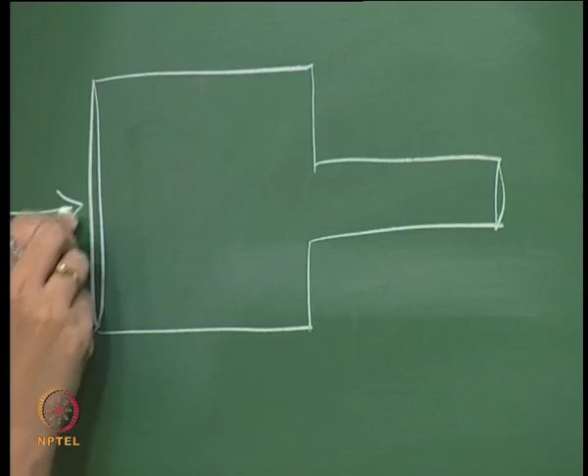Okay, and let's try and look at what is so special about that. So essentially what we see is that we have a large, slightly wide entrance and a slightly narrow exit. So we have a large entrance and a narrow exit, right? So let's complete the story first. Okay, so what you see on the wheel is that we have nozzles like this, four of its kind, right?

And the blue here is essentially steam being injected into these nozzles, right? Steam is injected into these nozzles. It enters through this wider entrance and comes out through this narrow exit, and it comes out and hits these buckets or blades with such an impact that it is able to rotate this wheel at 30,000 RPM, right?

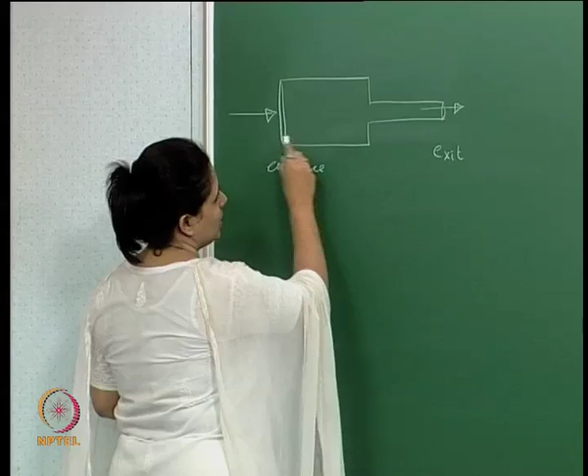And this ingenious way of doing this was first accomplished by the Swedish engineer Carl de Laval, and this is also called Laval's wheel, in 1893. So this was the first time something like this was actually used. So essentially what is it that is causing this? So we have a jet of steam coming in and producing a lot of impact, right?

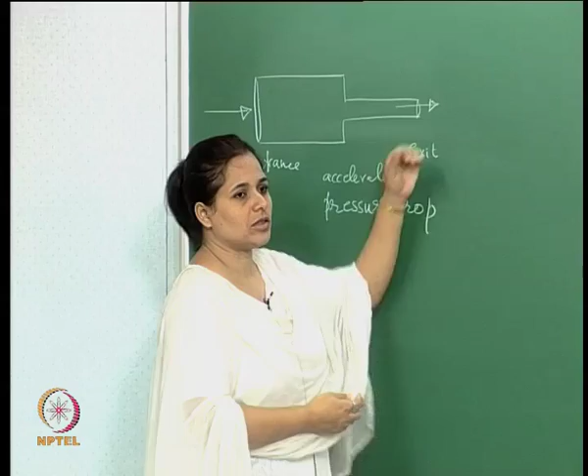So essentially what is happening is steam comes in and it is choked, that's the technical term to use. So essentially it comes here, it accelerates. There's a corresponding pressure drop. And when it hits the buckets, it's able to rotate it at speeds as high as 30,000 RPM, and that was pretty large at that point of time, right. So this is essentially a convergent nozzle.

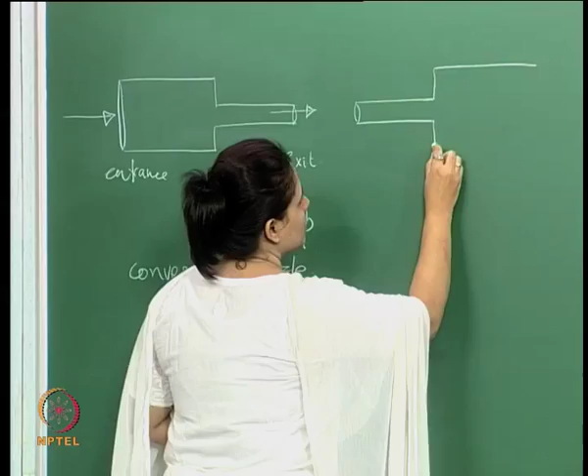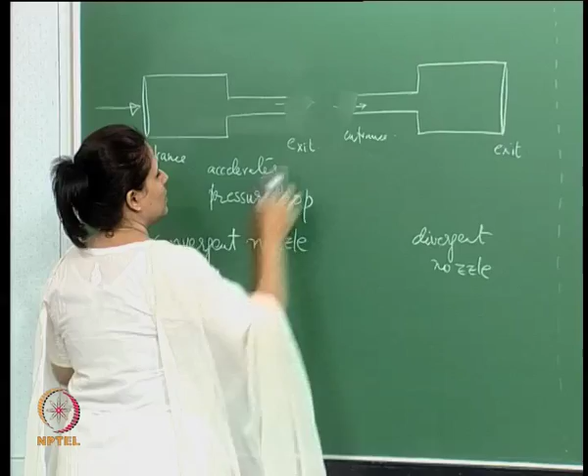Okay. Now we can have another type of nozzle as well, like that, where the entrance is narrow and the exit is large, right. So now this is the entrance and this is the exit, and this is a divergent nozzle. Okay. This is a divergent nozzle. Okay. Now what we can do is essentially combine these two, right. So what you know as probably something like this.

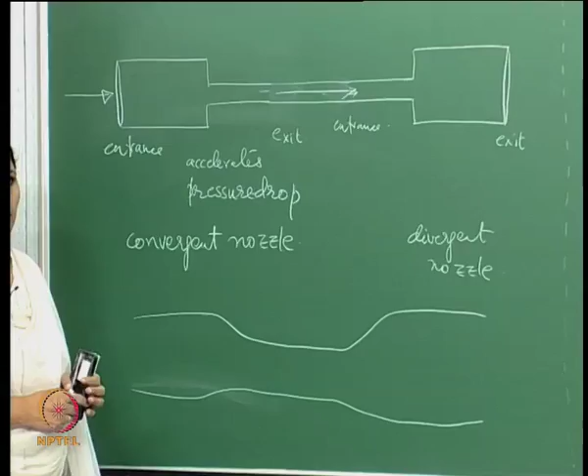So this is nothing but a convergent divergent nozzle, right. This is the modern day convergent divergent nozzle. So it works on the same principle of compressible flow, which was used by Laval the first time round. Okay, so this was the first of its kind way back in 1893.

And why is this important? Why am I bringing this up in terms of Laval's experiment? Well, the reason being that the thrust in the Bell X-1, the thrust in this plane, was provided by 4 convergent divergent nozzles, and that was the one which was able to move this Bell X-1 at speeds for which he was able to reach Mach 1.

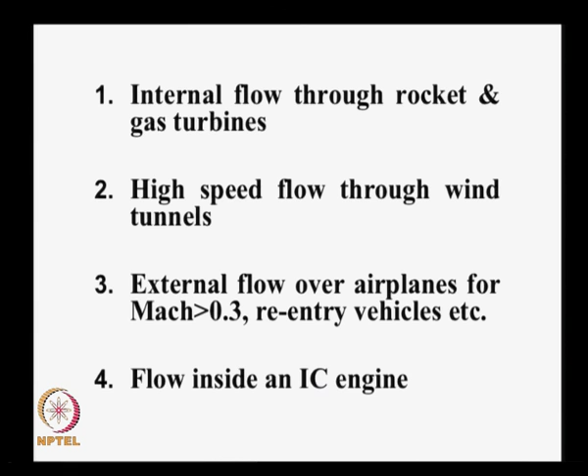Okay. Now I said something about external flow over airplanes for Mach 0.3. It seems like a thumb rule that if the flow over airplanes is less than 0.3, then the compressible nature of the fluid may be overlooked. So we'll try to see what that means with an example. For example, let us take an airplane.

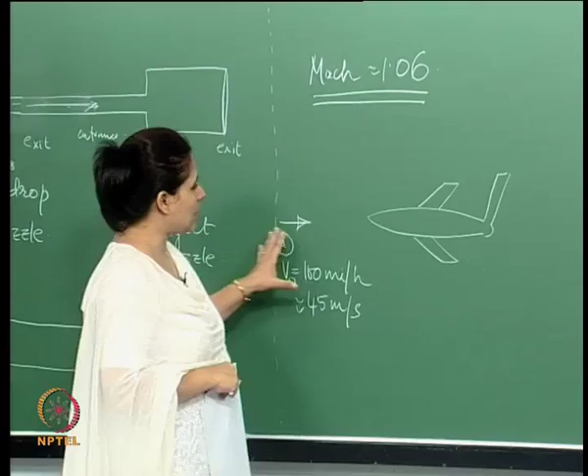Now this comes over here and it accelerates over the plane, and at some point here, say B, the speed out here is 150 miles per hour, which is around 67 meters per second. Now, as we saw in the example I showed you earlier, the flow accelerated and there was a corresponding pressure drop.

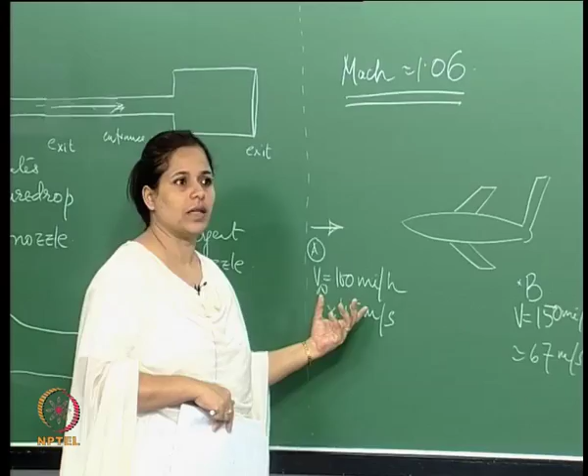So here too what we would like to know is, if the flow is being accelerated from 100 miles per hour to 150 miles per hour, then what is the corresponding pressure drop, and how we are going to go about finding this. Okay. First things first, let's just say that this flow out here is incompressible. It's not compressible in nature.

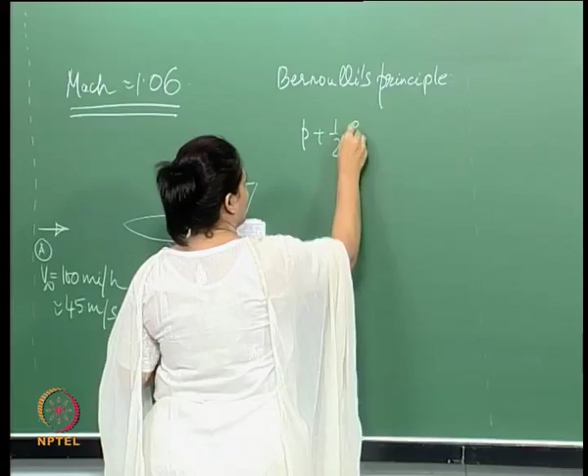Okay. So if that happens, and am I sure of that? No, I'm not. So I'm going to just assume it is incompressible and then go and verify whether my assumption is correct or not. So we'll just say it is incompressible for the time being, and we'll use Bernoulli's principle between A and B. So this is Bernoulli's principle. We'll apply that between A and B.

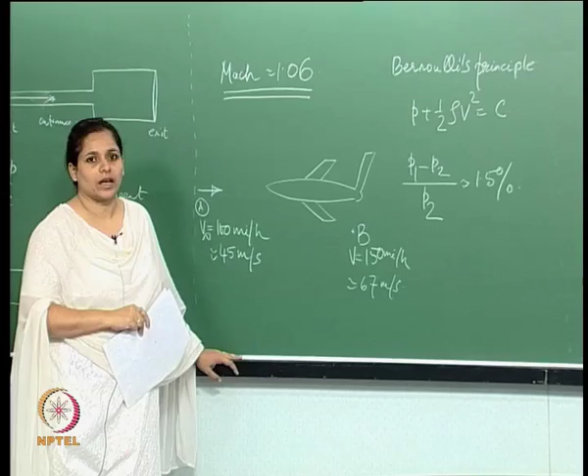So what we get is a relative pressure change of 1.5%. Okay, and now we want to see whether, since I used an incompressible theory over here, I was correct in doing that. If not, then what we will do. Okay. So let's move a little forward.

Now I keep saying that it is compressible in nature. Now how do we quantify that? How do we put math into this? Okay. I understand that there is a flow over here, and there is a corresponding pressure drop. The question is how much? How do I relate this pressure drop to the speed, or do I have to do that?

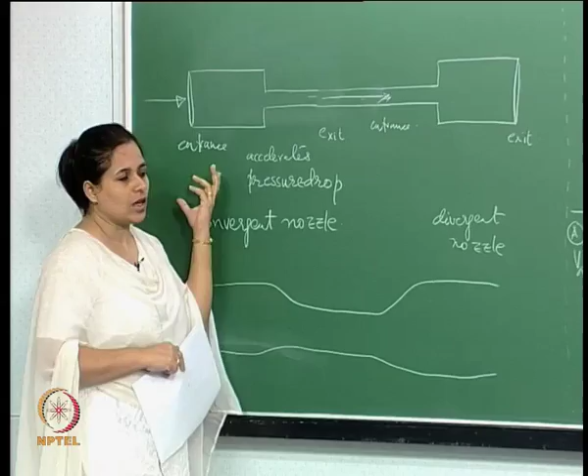Can I do that? So I need some sort of quantification to say how much a gas or a fluid is compressible, and only based on that can we say that this is an incompressible fluid or this is a compressible fluid. Let's try and find out some sort of quantification for this. Let's do this. So let us say we have a fluid element like this.

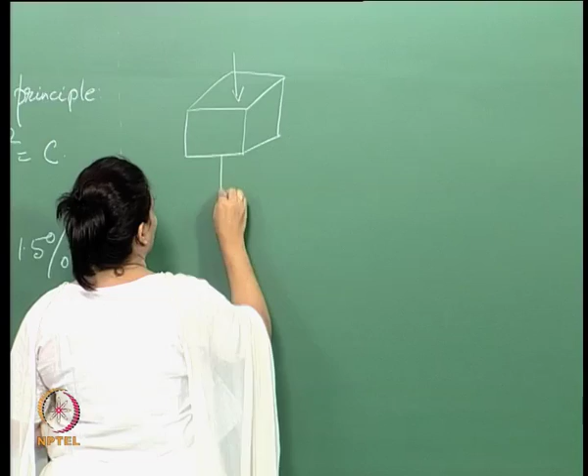Okay, and this is the pressure, and this is the volume. Okay. So we have

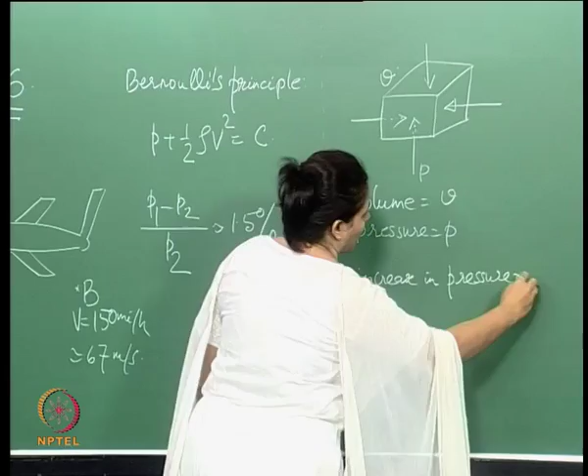Okay. Now say there is an increase in the pressure. I increase the pressure, so there is an increase which is dP, and there is a corresponding change in the volume, right. So I will write this as, so this is a corresponding change in volume.

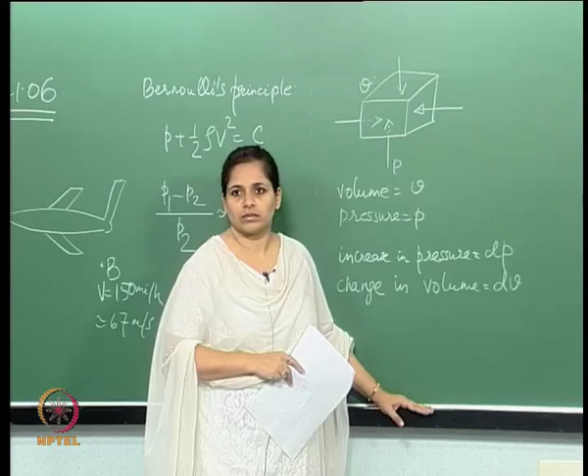Now, if there is an increase in pressure, the volume will decrease, and that we know from our known principles of gases, etc. So, I will note that when I write change here, I actually mean there is a decrease. So, I will denote that by a negative sign. So, if I have a positive pressure change, there is a negative volume change, right. So, negative change basically indicates there is a decrease in the volume.

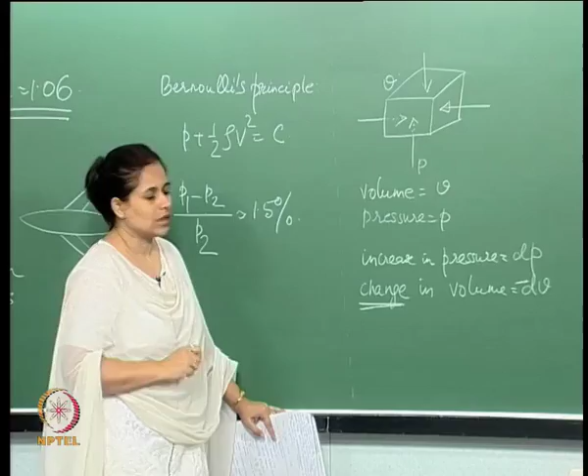Now, we shall define what I understand by compressibility, right. So, let me write this here. So, compressibility is defined so. Let me call that as tau. So, then I shall write that as, every time I write an equation, I always like to say that in words so that I understand what it means, so that I do not have to remember the expression itself. If I know what that means, I can always develop the expression.

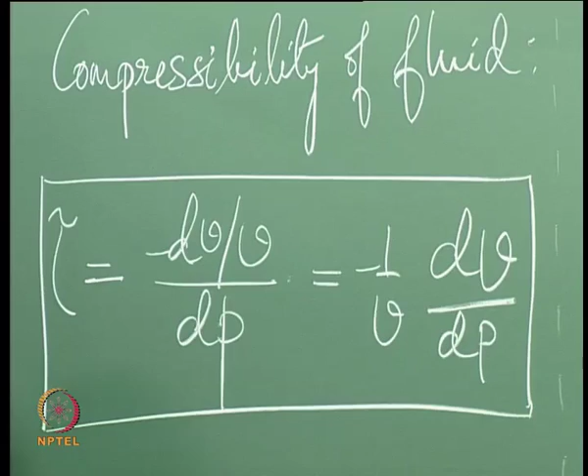So, what this means is that fractional change in volume, which is dV by V per unit change in the pressure. So, that is what compressibility means. There is a fractional change in the volume per unit change in pressure, and I can write this as, okay, let me call this as, I like to name my equations for further reference. So, that is how I define compressibility.

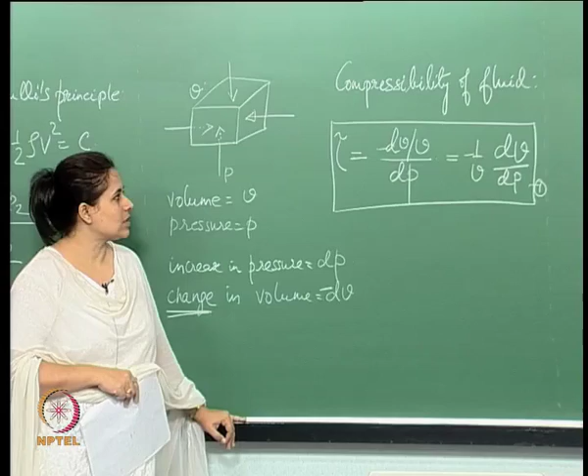Okay. Now, the next thing we can see here, that if there is a change in the pressure and there is a corresponding change in volume, what happens to the temperature? Now, if there is a change in pressure, there is change in volume, there should be a corresponding change in temperature as well, right. Now, if that is so, what is happening to that over here? Are we taking care of the temperature or no? Now, let us therefore define this compressibility for a few cases where we say something about the temperature, right. How do we do that?

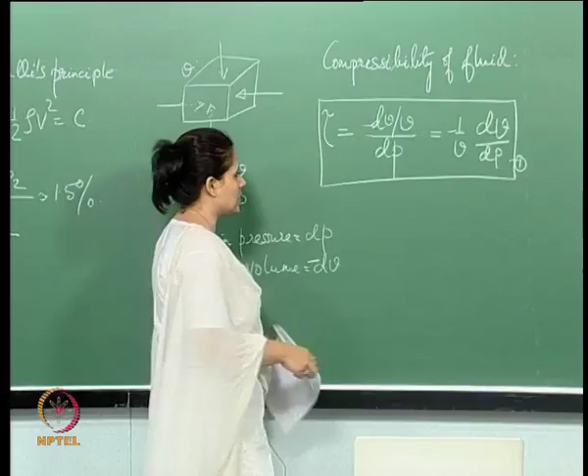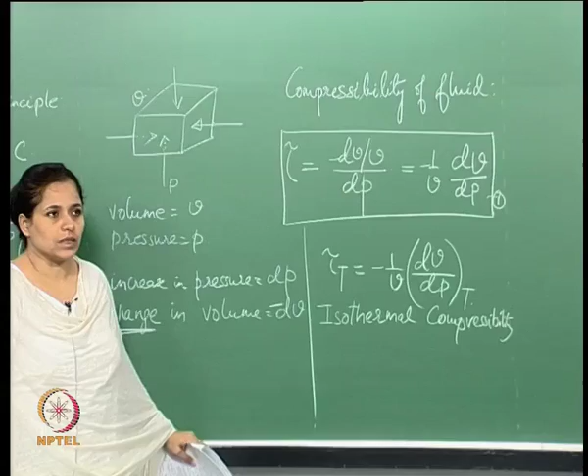Now, first thing we will see is that the temperature is constant, right. And how do we keep the temperature constant? That there is a non-zero heat transfer, right, and as a result of which the temperature is constant. Okay. So, then I will write my compressibility in this form. Okay. And we can call this, I think you should have guessed by now, that this is isothermal compressibility. So, this is isothermal compressibility. Okay. So, in this case the temperature is constant.

Okay. Now, some things to notice here is that when I write these subscripts out here, right. So, I write T over here, this is a denotation, and then when I write here, I am just bracketing this part of the derivative. I did not include this. Is that the right thing to do or a wrong thing? Or I should have included that anyways.

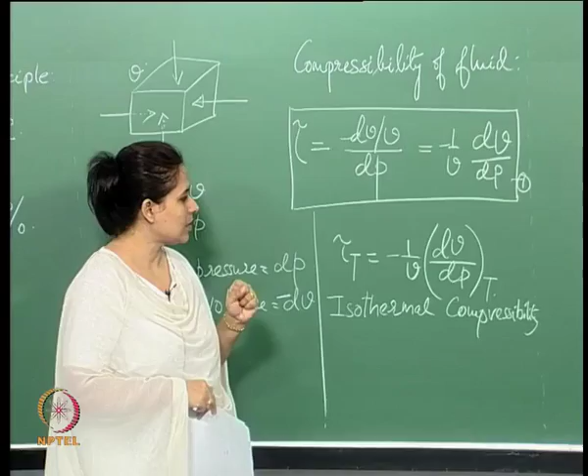Well, the point here is that the compressibility, when I am defining, right, the process under which the volume is changing based on this pressure. Now, this process is happening under an isothermal condition, right. So, when I increase the pressure, there is a change in volume. Now, that is the process during which the temperature is constant, right, and this process I am comparing with what the volume was before that process started, right. So, this is basically the state volume, right.

This is a state parameter, or it is a representation of the state, right, and then we started a process in which, say, there is an increase in the pressure and a corresponding decrease in volume. Now, that is the process which is happening under isothermal conditions. So, therefore, I am going to write it in this fashion. Okay, so one condition is where I keep the temperature constant.

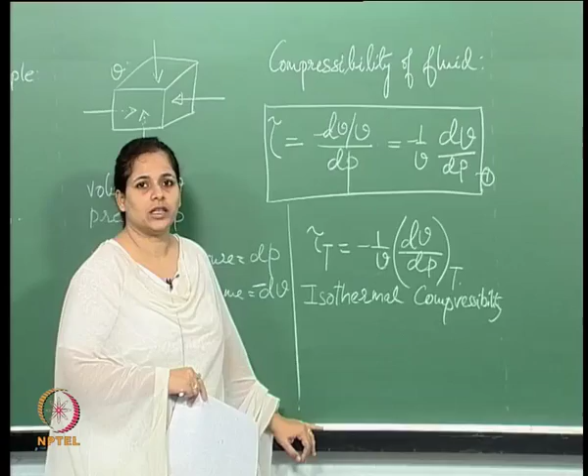Now, what if I do not keep the temperature constant? There is no heat transfer happening. There are no other dissipative forms, but there is no heat transfer happening. Then what happens? Do we have a condition for that, or what do we do? Now, we will define something else. Okay. Now, we will define an isentropic compressibility, and I will write that as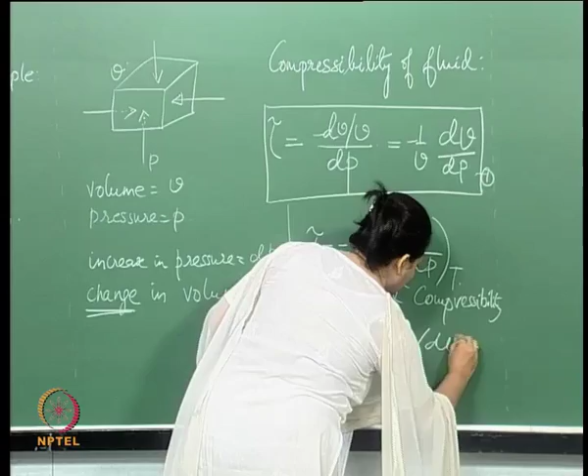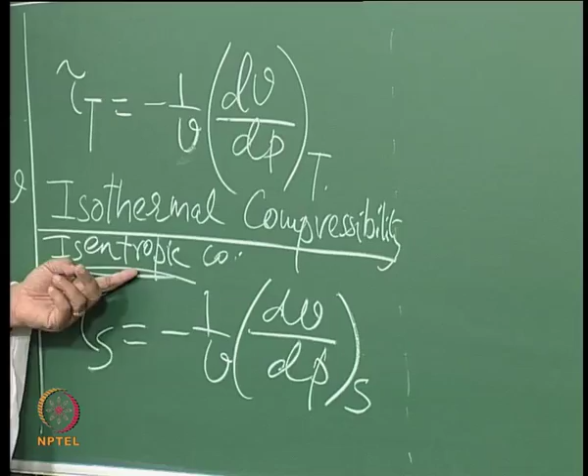Okay. Now, what is this S that I am writing here? Okay. Now, this is entropy. This is the property called entropy, and for an isentropic compressibility, so if I may write it this way, so this is isentropic compressibility, right. So, here the entropy is constant, right. In the isothermal case, the temperature was constant; for an isentropic case the entropy is constant.

Okay. Now, what is this S now, entropy? I guess you are familiar with this, but what I will do in the next lecture is do a basic review of thermodynamics, because this entropy is a thermodynamic variable, right. So, let me not dwell on that too much, but we will go ahead and do a brief review of thermodynamics, and so we will come back to what we mean by isentropic and entropy and so on and so forth. Okay.

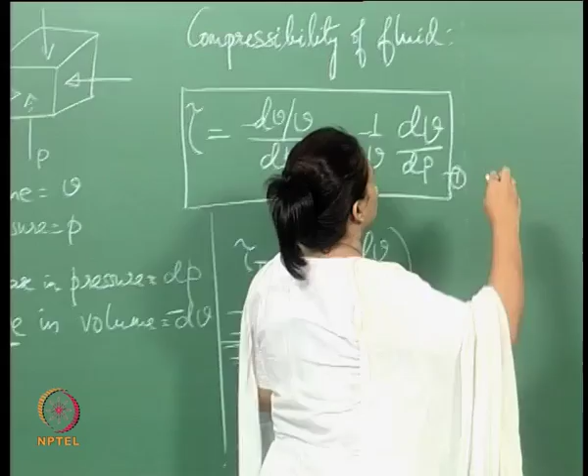All right. So, now let me give you some numbers. Numbers always help, right, to get a feel for how compressible or less compressible and so on. For example, this is the isothermal compressibility for water, right. This is for water. And this is for air, and both these are at 1 atmosphere.

So, what do you notice from here? What do you see? These are the numbers that we have. So, that is for water and this is for air. What exactly can you infer from here? What you can see is that the compressibility of air is much more than that of water, which is essentially what it is, that for gases the compressibility is much more than water, right.

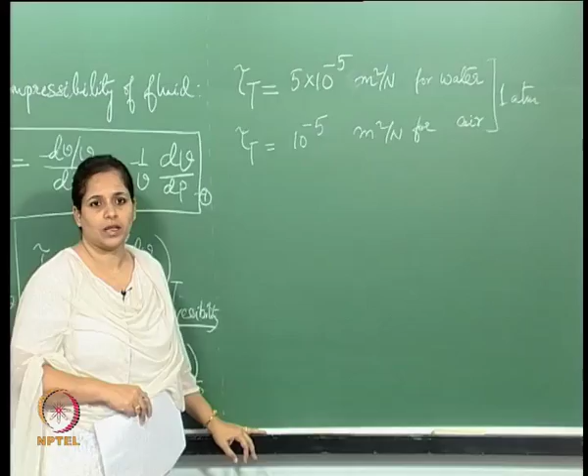So, we have defined pressure, volume, density, temperature, etc. So, what is the relationship between them? If we do have changes in them, how they are related, if at all, right. So, let us do something simple and develop a few expressions. Say we have a mass of gas, a unit mass of gas. So, we define a specific volume, right. So, therefore, we have density, right, or we can write this as

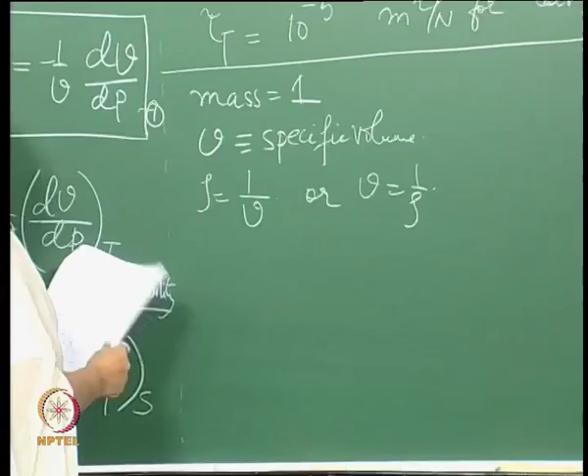okay. Then let us do a little bit of math and do this, right. So, basically this is simple here, all we are trying to do is get a relationship in terms of the compressibility. So, this is the equation 1 that we wrote about. We need a derivative something like this, right. So, when I have this expression over here, dV by dP. So, if you can do this math, this is simple. So, I will do this. Right. So, this is the derivative.

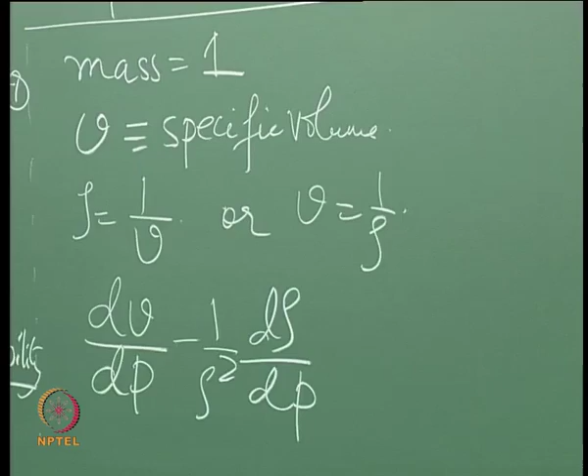So, therefore, now I will try and write the compressibility. So, now if I write the compressibility, how does that look? The compressibility is nothing but minus 1 by V dV by dP, and we got 1 by V as rho into dV by dP, which is over here. So, we input that in there, which is minus 1 by rho square d rho dP, right. So, this is what we get.

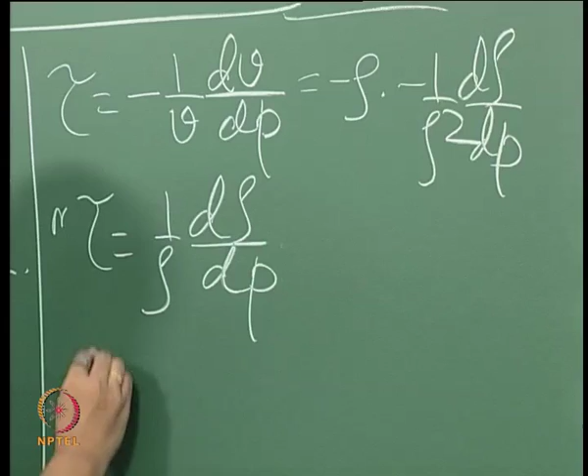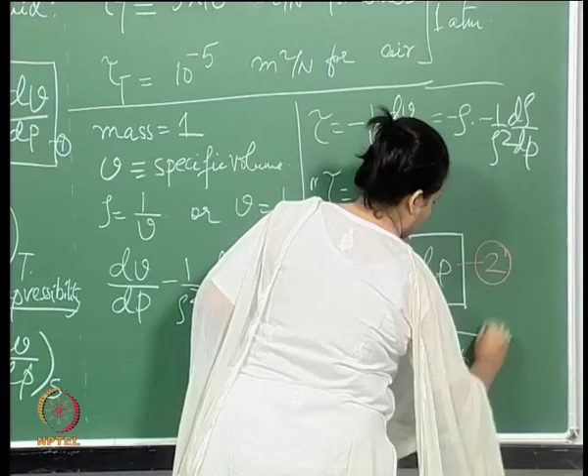So, what I will do is write this out this way. So, essentially d rho is equal to rho tau dP, right. We will write that, or we can also write this as, okay. So, let us say this is, okay. So, what we will say over here is that

in here what you can see, we have just now said that for a gas, the compressibility is much higher than that of a liquid, right. So, therefore, for a given pressure, the density change in a gas is much higher than in a liquid, because this compressibility is much higher for a gas, right.

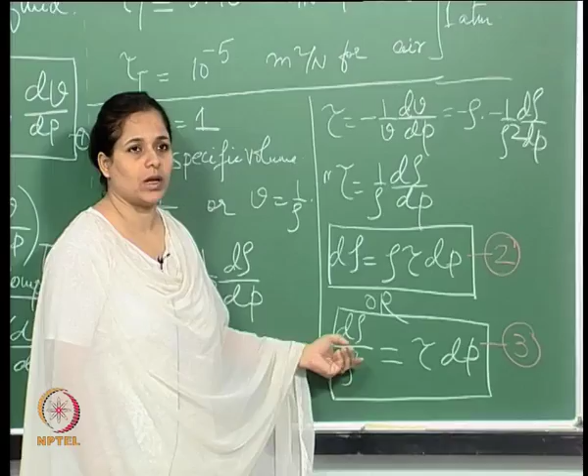So, therefore, for a given pressure, you can see here this is the fractional change in density, right. So, for air for example, for a given pressure change, there is going to be a much larger density change compared to say water, essentially because this compressibility factor here is much larger for air than for liquid.

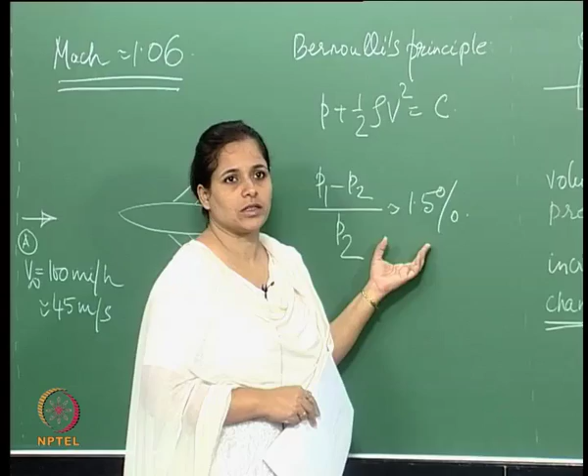Having said that, now let us go back to your previous problem. So, we have this problem over here, right. This here, and we said that the pressure change is 1.5%. Now, you can do the rest of the math yourself and relate the densities, etc. if you want. In this case, it was incompressible. So, we said there is no change in the density. When we consider no change in density, what we found is that the pressure change is 1.5%.

But what I can say here is that if I were to consider this as compressible, then the density change is essentially given by this relationship, right.

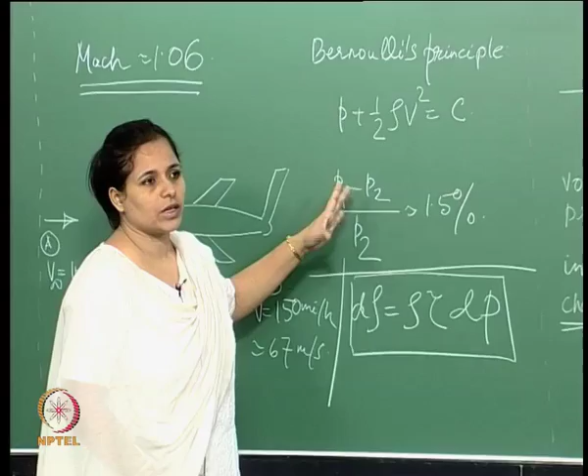Now, in here, since this pressure change is very small, it is just 1.5%. So I can say that we have infinitesimal or very small changes in density, and hence it is okay for me to ignore that, so I can more or less safely say that this is an incompressible fluid. So therefore, changes in density here are not very dominant, and it is okay to use the incompressible theory over here. So hence I was fine doing this.

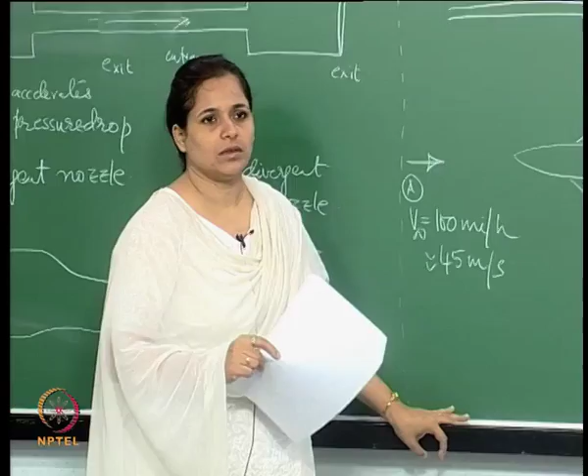And then of course, the immediate question which we should be asking: if we had a flow which was going from 100 miles per hour and it reached up to 150 miles per hour, and that caused changes in density which we were able to ignore, how far would we be able to do that, or for how large or how small speeds can we do that? If I had a velocity going from say 1000 miles per hour up to 1500 miles per hour, would I still see changes in pressure which were very small and causing changes in density which I could ignore? Would that be a possibility?

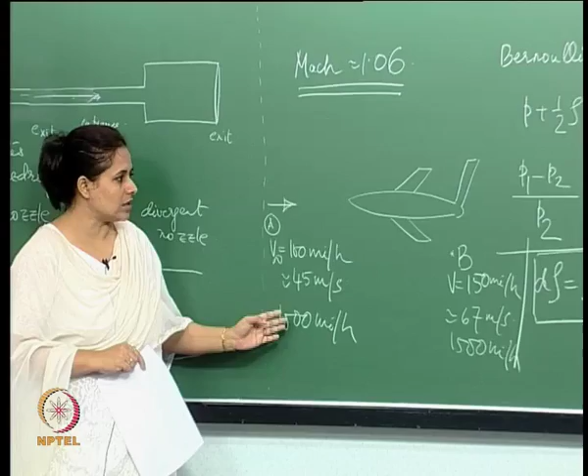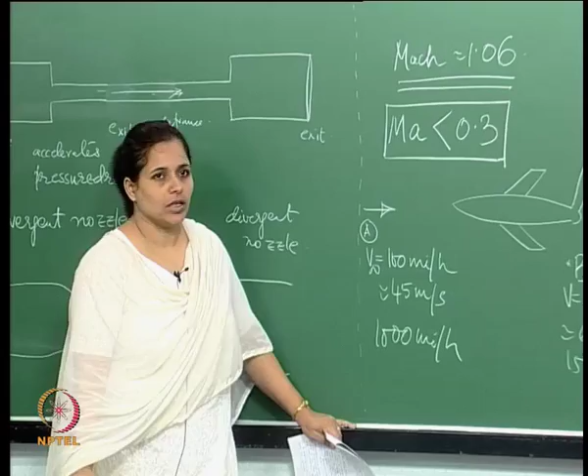So therefore, I need to relate this now to the speed here, and that is where I first said that for flow over airplanes for Mach numbers less than 0.3 it is incompressible. So over a period of time, with experiments etc., we have been able to see that, more or less as a thumb rule, for Mach numbers less than 0.3, the changes in density can be ignored. So therefore, as a thumb rule, for this we can consider the flow to be incompressible.

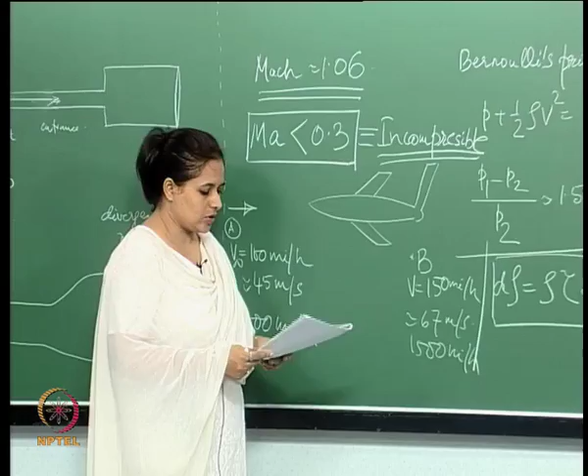Right. So to answer the question whether we know a lot about this topic from history and literature: well, we know enough to know these thumb rules. People have worked on this over a period of time, so we kind of know these sort of things. Okay. Now, like I said, the next thing to do would be a brief review of thermodynamics. What is the connection of thermodynamics with this? I said something about entropy when we defined isentropic compressibility, but why do we need to study thermodynamics when we are dealing with compressible flows?

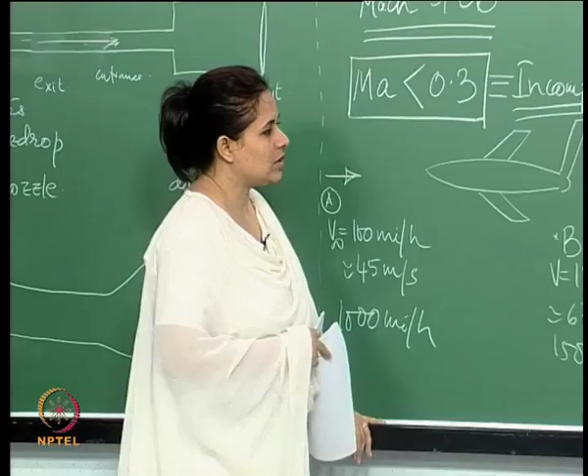Now we saw that when we have higher speed flows, or to generalize, when we have changes in pressure causing changes in density which are not small enough to be ignored, there should also be changes in temperature. When we consider those changes in temperature, that's when we need to study a little bit of thermodynamics before we proceed. So I'll do a brief review of that. Now let's just begin with something like this.

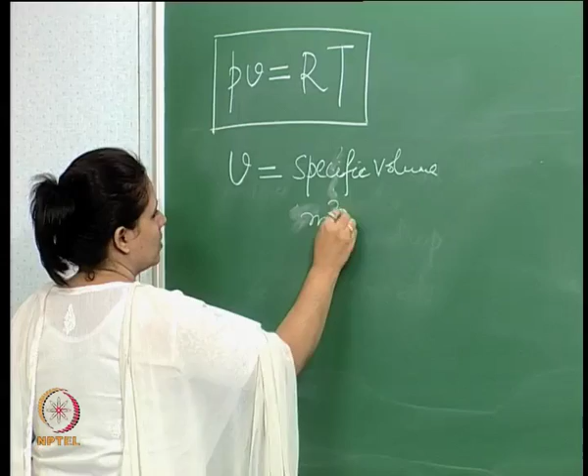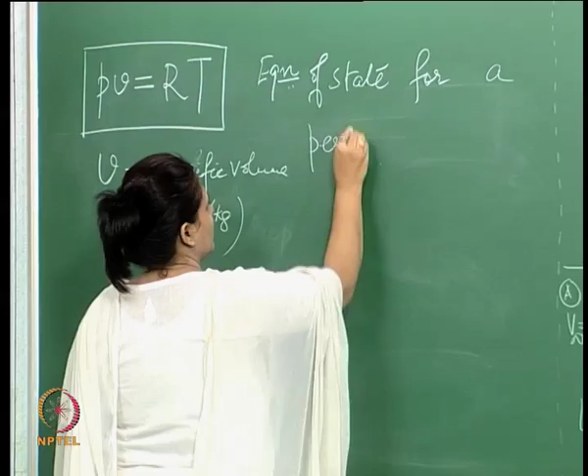Now this P here is pressure, V here is specific volume, which is volume per unit mass. So I'll just write the unit here. And R is the specific gas constant and T is the temperature. Now this is something that we are familiar with. So let me write here, what exactly is this? I hope you can recognize this. This is the equation of state. So this is an equation of state for a perfect gas.

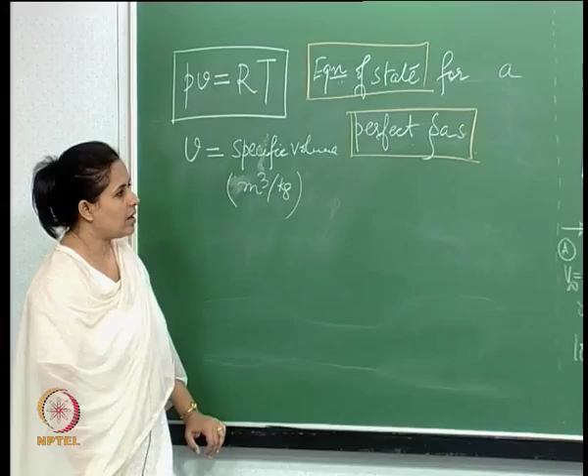There are two things over here: one is equation of state and the other is perfect gas. What do these things mean? What do we mean by a gas which is perfect? All we have done here is taken the pressure, the volume, temperature, connected them by some sort of a constant, and we are saying that this is the equation of state. It is some sort of equation, and we are saying this is for a perfect gas. Now, what do we understand by this perfect gas? Let's just define that first.

Now, a fluid essentially consists of molecules. I think we are all aware of that, and these molecules are very widely spread for gases and more closely packed for a liquid. And these particles or molecules are in constant random motion.

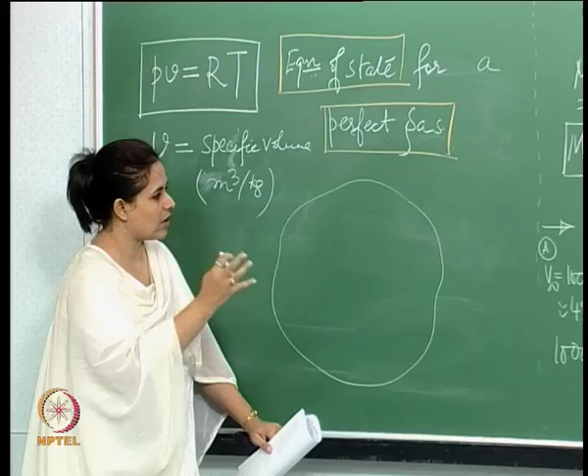They are in random motion, right? So now if I take, say, a volume like that, right? So there is a constant inflow and outflow of molecules across this boundary. So the number of molecules out here is constantly changing, and we have free flow of molecules on either side which are in constant motion.

Now, when we have these particles, by nature there are intermolecular forces, we know that, right. Now, if we have particles which are very far off, then they exhibit very small or very weak attractive force, and if they are very close, like that, then they have a strong repelling force. So these are the intermolecular forces, right.

So therefore, these intermolecular forces kind of define or control, for that matter, the movement of these particles, right. I think it is kind of obvious to see from here. Now, the thing is, what is this perfect gas? The perfect gas is one when we ignore these. When I say these, I mean these intermolecular forces.

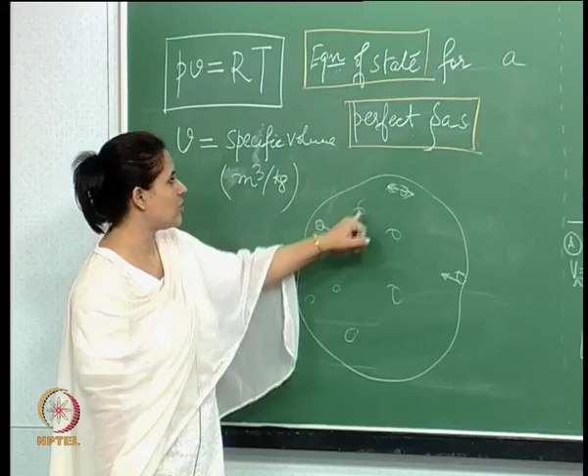For a perfect gas, we ignore these forces, and when we do that, there is a certain relationship between the pressure, volume, temperature, density, etc., of that gas, and that relationship is what we define as the equation of state. So which means that if I have some mass of gas, then that will obey this sort of a relationship, provided we ignore the intermolecular forces, right.

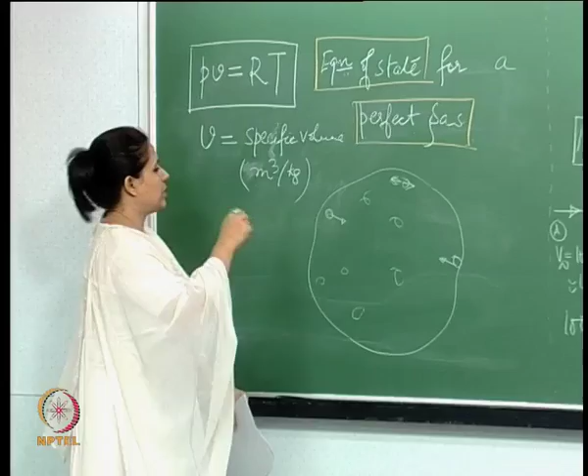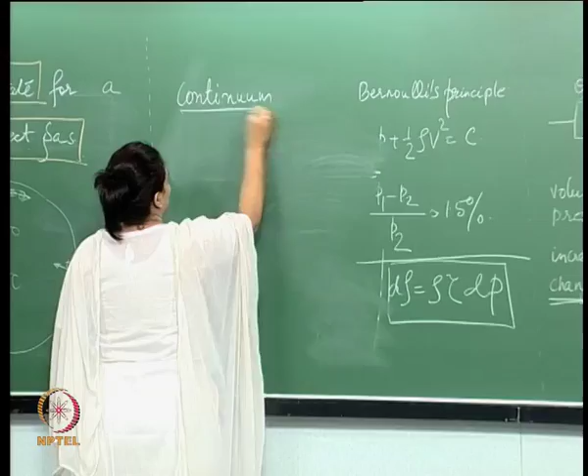Now, the next question is, when I define this pressure, volume, temperature, etc., are we considering the pressure of every single particle? Are we considering the temperatures of every single particle when I take a mass of gas, or what am I doing, right? Now, it is important to say that all these parameters here are all defined on a continuum. These are all defined on a continuum, right.

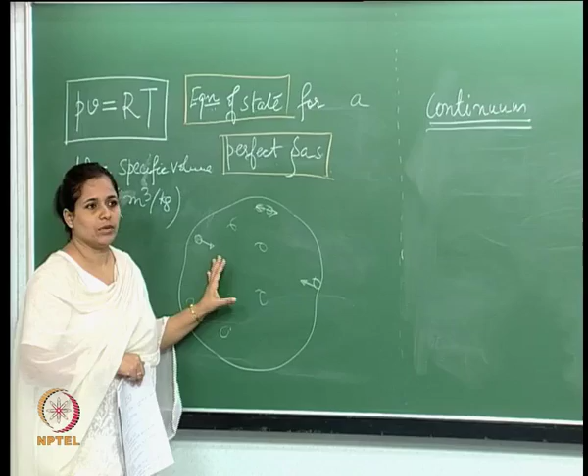Now, what do we mean by that? What we mean by this is, let me take a boundary like this, and I said that the number of particles is changing, and this is just an imaginary boundary. So what I am going to do here is take a collection of these particles; I take such a boundary that the number of particles is more or less not changing. Okay. So then what happens is, let me redraw this.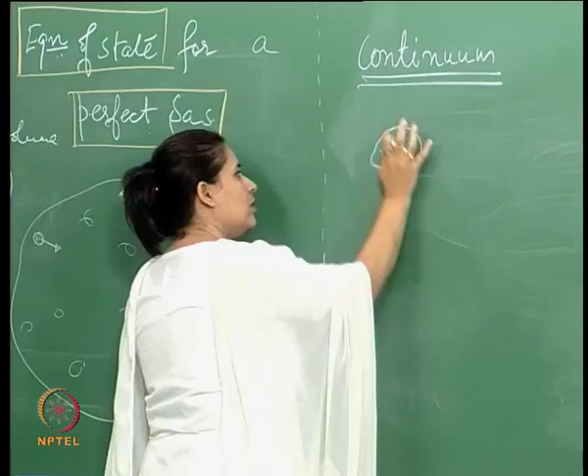So I have a boundary like this, which is big enough so that I do not consider individual movements or properties of the particles, right. Instead, we are concerned about the behavior of this whole collection of particles as a whole, right. So individual behavior of each particle can be ignored.

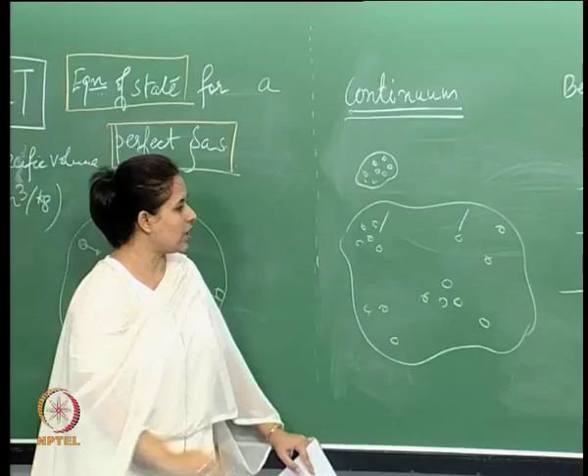At the same time, it is not so large that there is agglomeration of particles here, here, here, and the particles are not uniformly distributed. Then as a collection, we may not be able to say that there is one particular temperature, pressure, volume, because for example, if I have something like this, the temperature here will probably be much larger than the temperature over here. So it should not be so large as well.

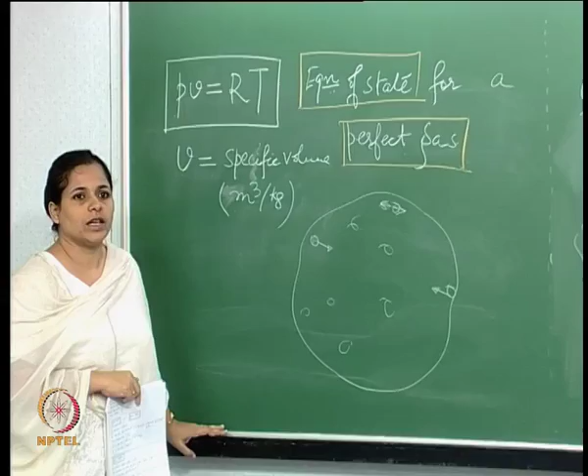Instead, if I have a volume like this, this would be a good continuum, so that I can just consider this as a group of particles. More or less around here the number of particles remains the same, and I can consider for this group of particles a single value of the pressure, temperature, density, volume, etc. So that's what we define as a continuum. So all these parameters, pressure, volume, temperature, etc., are all defined on a continuum.

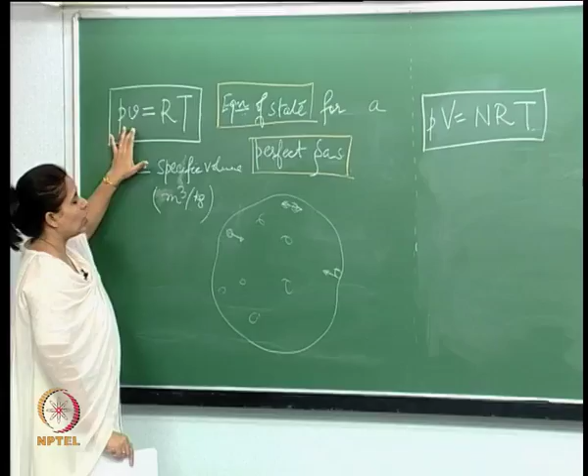Okay. Now we can write this expression in some more ways. For example, okay. So here we wrote this in terms of specific volume, right, which means the volume per unit mass. All I have done here is, because this here is the volume, this is volume, okay.

This is volume and this is gas constant. Let me differentiate between this and this. So let me call this R star. This one is the specific gas constant and this is the gas constant. So basically what we are doing is multiplying the whole equation by the mass. Okay. Now what is this n here?

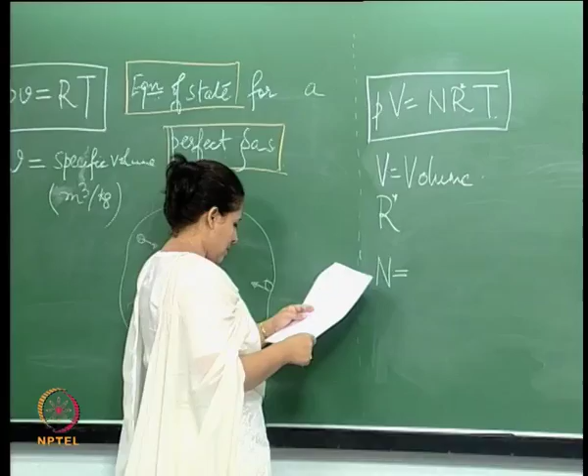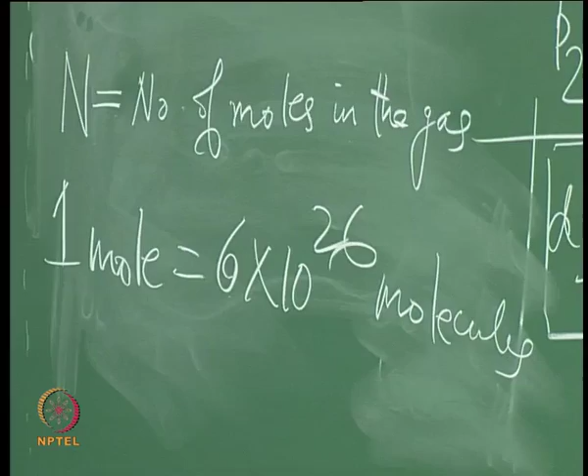So the n is the number of moles in the gas, which essentially is doing nothing but giving us an idea of the number of molecules in the gas, in the group of gas that we are considering. And I think you will remember that 1 mole of gas consists of 6 times 10 to the power 26 molecules, the Avogadro number of molecules. Right. So what we are essentially saying here is that for a given number of molecules of that particular gas, this is the relationship that it holds.

Okay. So that is essentially the equation of state for a perfect gas, and I will just give you some numbers, right, just to remember some of these numbers, to be familiar with it, and we will do just a small example and we will wind it up for today.

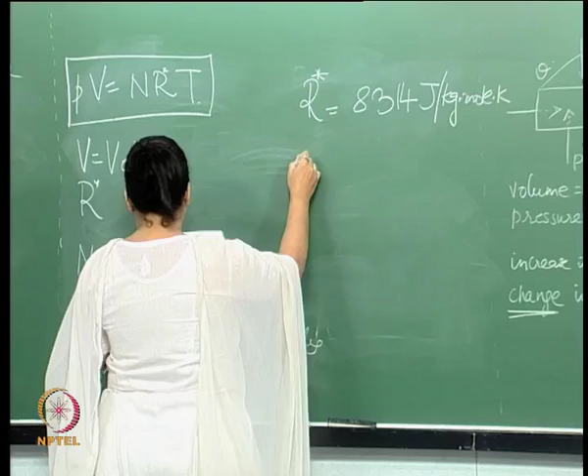Okay. So for example, this is the universal gas constant. So this is our R star basically. How did I write it? Yeah, star. So this is, for example, 8314 joules per kg mole Kelvin, right, and say specific gas constant is per mass, this is the molecular weight, and for air, this is equal to 287 joules per kg Kelvin. Okay. So, these are some numbers which you should be just familiar with. What we will do now is just quickly do this and wind up for today.

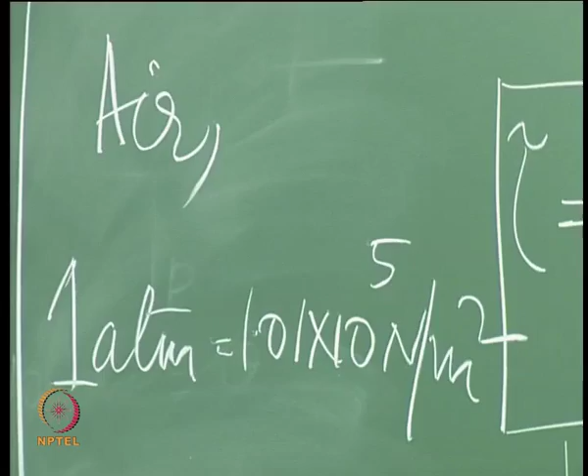Okay. Now, all I am saying is that air is given, okay, so I have air and the pressure is at 1 atmosphere, right, and that I can write as... Calculate the isothermal compressibility, right. What is the isothermal compressibility? So, compressibility is nothing but fractional change in volume per unit change in pressure. So, this I can write as... right. So, isothermal compressibility. So, how do I find this out?

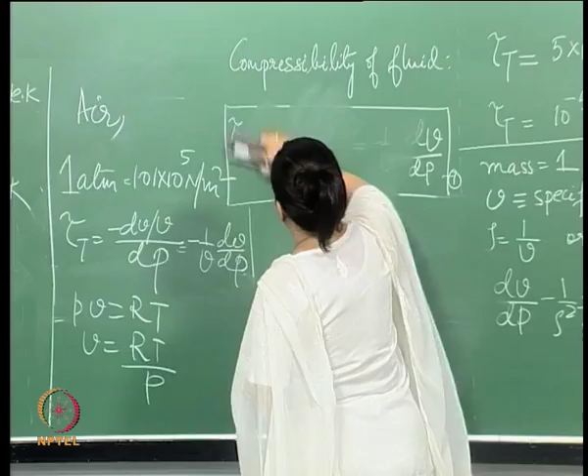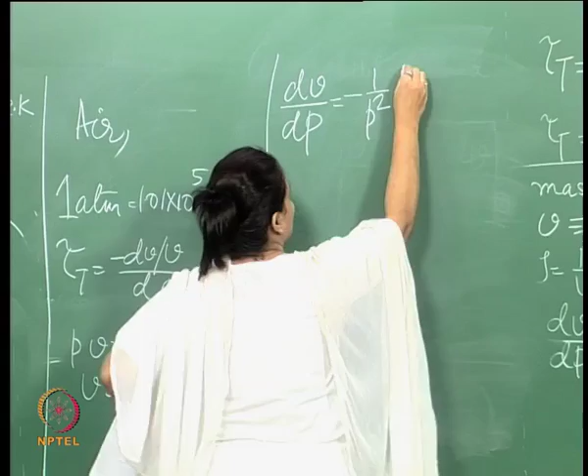Okay. Now, let us go back to the perfect gas equation of state. So, P v is equal to R T. So, if I do this, then I will write the volume as R T by P, right. Now, if I do that, then all I need to do is dV by dP, right. So, I do dV by dP, and right, this is what we get. So, then if I input the dV by dP into this expression, what I get is this. Hopefully, you should be able to. So, 1 by P and the P is given.

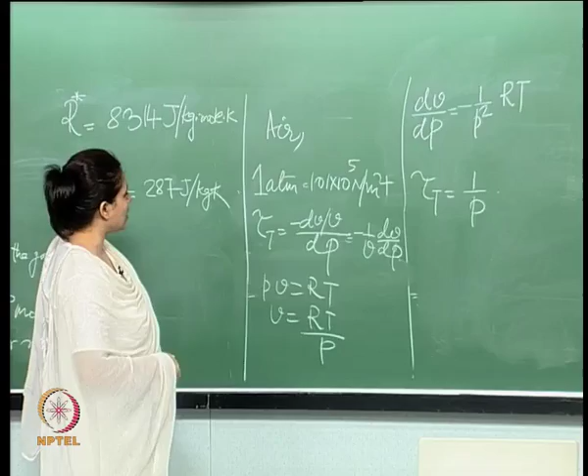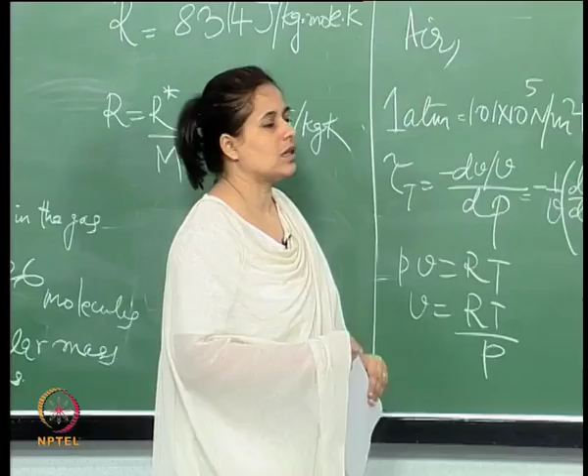Okay. Now, what you can see here is that I said isothermal compressibility, right. So, what I mean is that you remember this expression, right. Essentially, this change in volume and pressure is happening over a process which is isothermal. So, the temperature is constant. So, therefore, when I did this over here, I kept the temperature constant, and that's how I calculated the derivative. Now, temperature is constant, meaning that we are not considering any internal forces, obviously, because then there will be changes in its internal energy, and I cannot say that the temperature is constant. So, therefore, I can only calculate the isothermal compressibility from here, right.

For example, I have the isentropic compressibility as well. It is the same formula, and we have the same etc. available. So, I can actually use that. But the idea is that when you use such a formula, you need to understand what exactly you are using it for. So, if I said find out the isentropic compressibility, you cannot use a process in which temperature is constant. Okay. So, we will still need to think about that. So, I think we will stop over here.

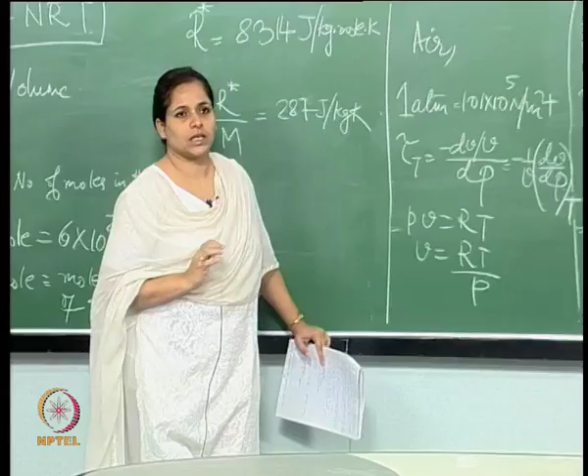What we shall continue to do next is this: so far, whatever we did, temperature is constant. So, why are we going to do a review of thermodynamics? Because when temperature is not constant, then I need more variables. Just the pressure, volume, temperature is not going to be sufficient to study my gas or any process. What I will need further is an expression as to how these variables relate with temperature, and to do that we will need more variables, and that is what thermodynamics will provide, right. The concept of entropy, internal energy, and so on and so forth. We will continue to do that in the next lecture.